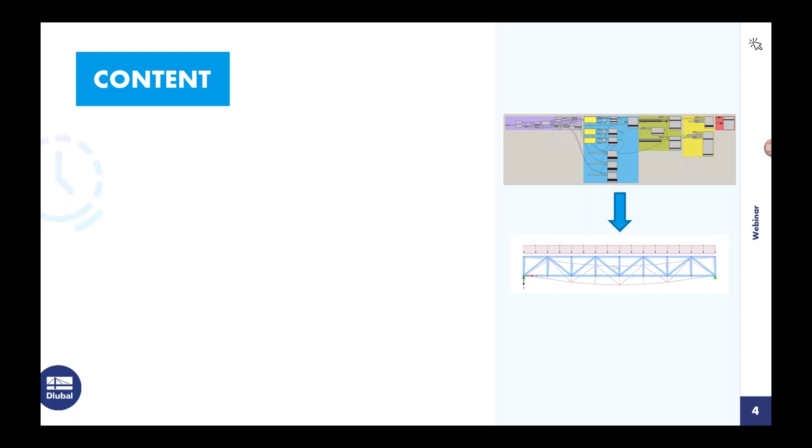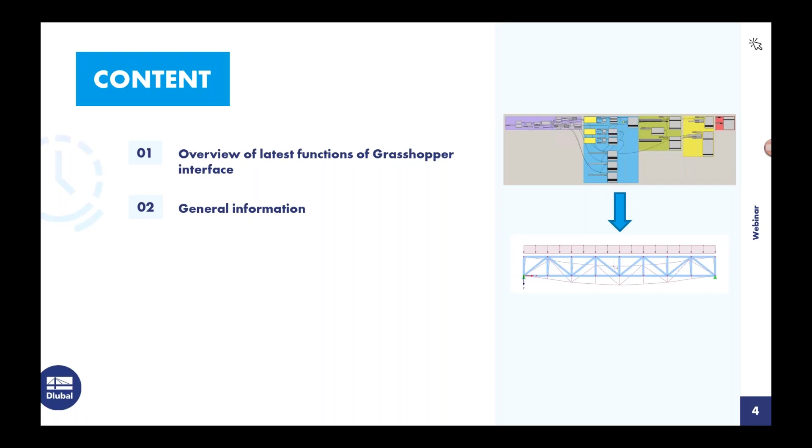So let's start with the presentation and have a look at the schedule for today. First, I'd like to start with an update on the latest implementation we developed for the Grasshopper interface, and then I'd like to show some basic information about the installation and the interface itself. And after that, we create a basic geometry in Grasshopper and define all necessary model and load data and export it to RFEM.

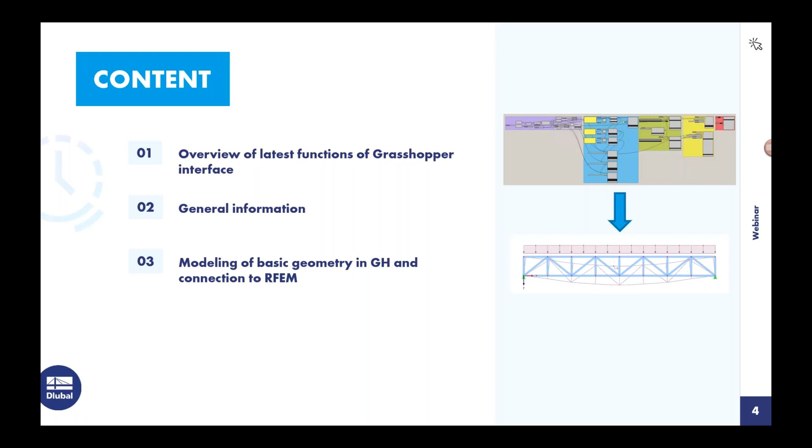So what are the new features we have implemented recently? First, when we're using the member component, we can now assign existing design properties to the member for steel and timber design. These properties are not defined in Grasshopper directly, but we can read them from a template in RFEM. We also have new components for the definition of imperfections, and at the request of a customer, non-linearities were also implemented in the line hinge component.

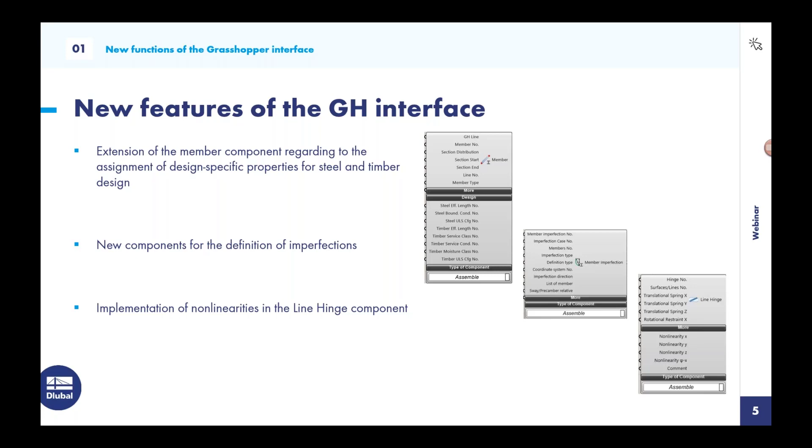The next new feature is that it's now possible to access the templates in RFEM via the export component. So for example, we can now define design properties for steel and timber in a template in RFEM, and access these defined design properties with the member component in Grasshopper. Also, the export of polylines has been optimized, and we implemented new components for closing and opening RFEM files in Grasshopper.

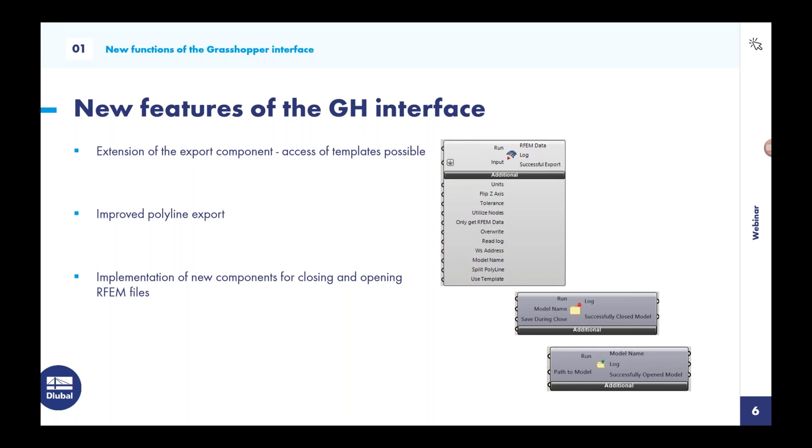Now I will give you short information about the installation. The interface is not automatically installed; the installation must be done manually. With the installation of RFEM 6, you will receive a setup file, which is stored in the folder shown in this image. You need to run the file, and the plugin will be installed for Rhino and Grasshopper. In addition, the web services must be activated in the RFEM program options, so that the connection between RFEM and Grasshopper can be established.

After the installation, we have two plugins. The plugin for the Rhino RFEM link: with this plugin, we can import and export data between Rhino and RFEM. We can import and export lines and surfaces, and this is limited to the pure geometry. So information about sections or material thicknesses is not exported with this link.

In this webinar, we will show you the Grasshopper RFEM link. We have the import and export option as well, with the focus on the export to RFEM components. The import works in such a way that we are able to read the information defined in RFEM and use it further in Grasshopper. We can export model data like sections, members, thicknesses, hinges, materials, and supports, as well as load cases, load combinations, and the loads.

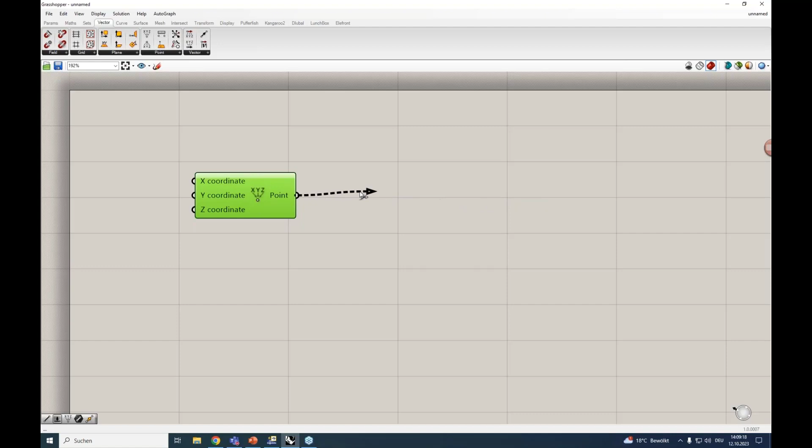In Rhino we have this icon, and here we can start Grasshopper. If we start Grasshopper, we get a 2D script environment, and on this environment we can put different components. For example, we have components like this, with an input and an output, and we can connect these components to each other to create algorithms and build parametric models.

Once the plugin is installed for Grasshopper, we see a Dlubal tab here, and there are 3 groups available in this Dlubal tab. We have one group for the model data, like member, section, material, surfaces, openings, and so on. And we have a second group for the load data, like load cases, nodal loads, support loads, loads themselves, and also design situations and static analysis settings.

And in the third group, we have the export component and other components related to the import. We only need the export component today, and I will go more into detail about this one at the end.

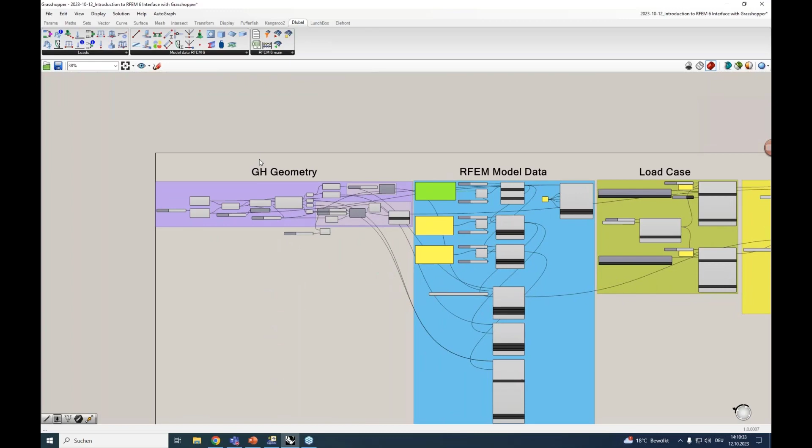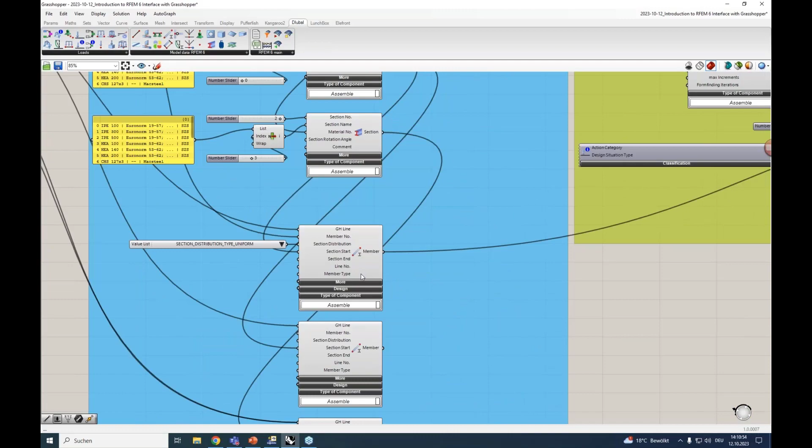And what's the plan for today? A little preview of what we're going to do today. We want to model a small structure and then assign to this structure the model data and load data with the help of the RFEM link. And afterwards, we want to export the model to RFEM. So we assign materials, sections, members, nodal supports, load cases, and loads.

We're going to start today with the geometry in Grasshopper. So we start with a new project, and we'd like to generate a truss girder. I shared the screen with Rhino so we can see how we generate the model in Grasshopper. We're going to generate two lines along the x-axis, and between these two lines we want to generate the truss.

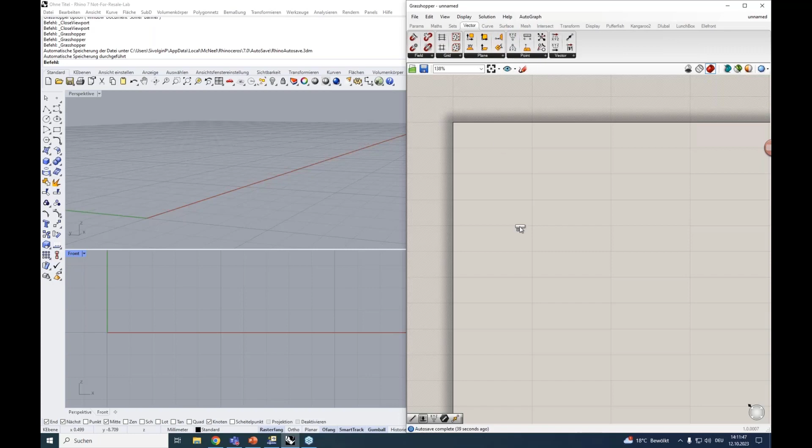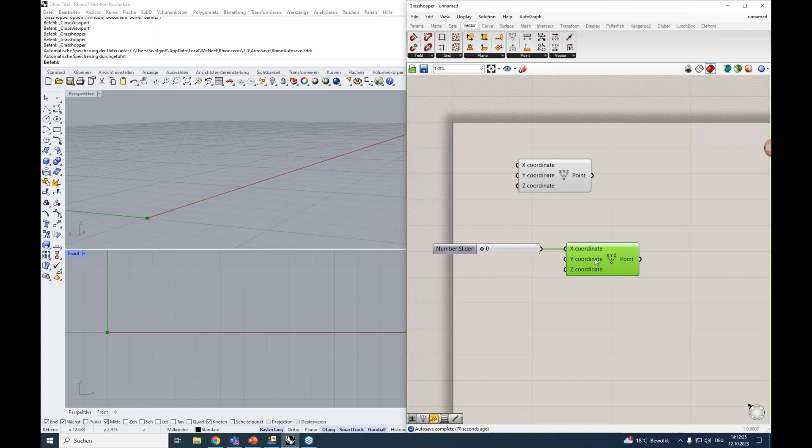First we start with a point. We create a construction point using this construction point component, and afterwards we copy this point by holding down the Alt key. Now we have generated 2 points, and for the second point we set up a number slider for the x coordinate, so we can adjust it with the slider. We double click on the canvas to generate a slider between 0 and 15. Now we can connect it to the input of this construction point component.

After that, we want to create a line between these 2 points. See, this is the second point we created. For this, we use the line component. You can click the canvas and write the name of the component, or you can also find the component in the curve tab and grab it from there. We need a start point and end point as input of this component. So we have these 2 points, and now we can generate a line between them.

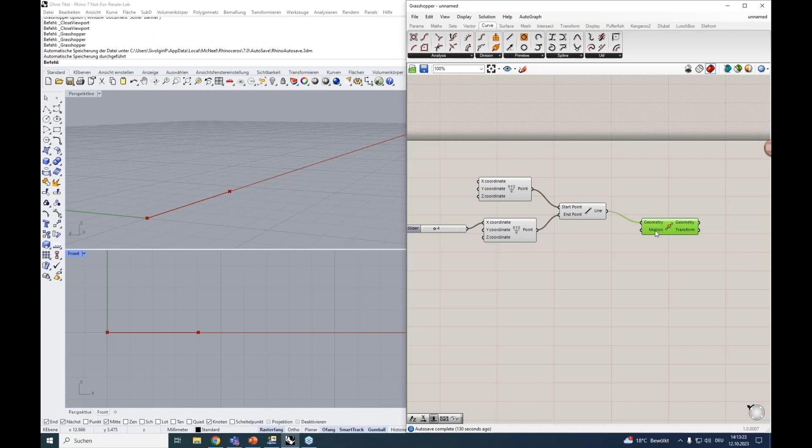Our next step is to copy the line with the move component. Here we have to input the geometry and the motion. The motion is by default set to 10 in the Z direction, but we want to define it ourselves. So first we need the direction we want to move the line in, and we can set up a range again with a number slider. We want it to move from 0 to 5 in the Z-axis. And if we connect it, we see the second line appear here on the screen.

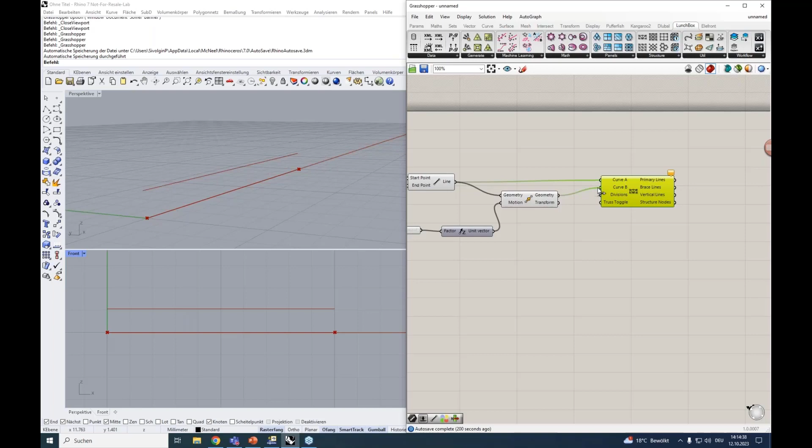After this, we want to generate a truss between these 2 lines. For this, we use LunchBox in Grasshopper. Here we have different options to generate a structure. We want to generate a 2D truss between 2 curves. Our curves here are the lines we're using, and between these 2 lines we can generate this truss.

And for this truss, we can set a number slider for the divisions. That's the number of bays we have in this truss girder. So we set up again a number slider, and now we can control the number of divisions or the number of bays in this truss girder. So that's our structure.

As an output of this generator, we get different outputs. We have the primary lines, that's the lines for our upper chord and our lower chord. We get the lines for the diagonals, and we get the vertical lines, and we also get the points of our structure.

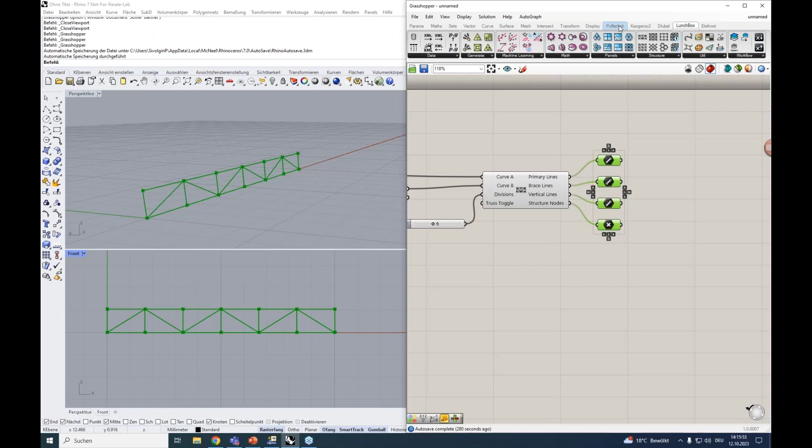So now we want to apply the model data and the load data onto the structure. For this we use these components from the Dlubal tab. And the first thing we want to do is to define a material. If we are defining a material, we have two inputs. The first input is the material number. This is the material index we gave the material in RFEM. We can set it as number 1.

And the material name can be defined with a panel. So we can say we have this material name here and just put it in the component. But we want to use several materials for this example, or just have the possibility to use several materials without having to change the name every time in this component. So for this we can create something like a material library. I copied this from another Grasshopper file. And this is also just a simple panel with the material names inside we often use.

And we can now use this index number in this list to define the material names. And we're doing this with another component, the list item component. With this component, we can retrieve a specific item from a list. And we can access the index number with a number slider. So we have here both material names. So we generate a number slider between 0 and 12. And in the output, we receive now the corresponding material name.

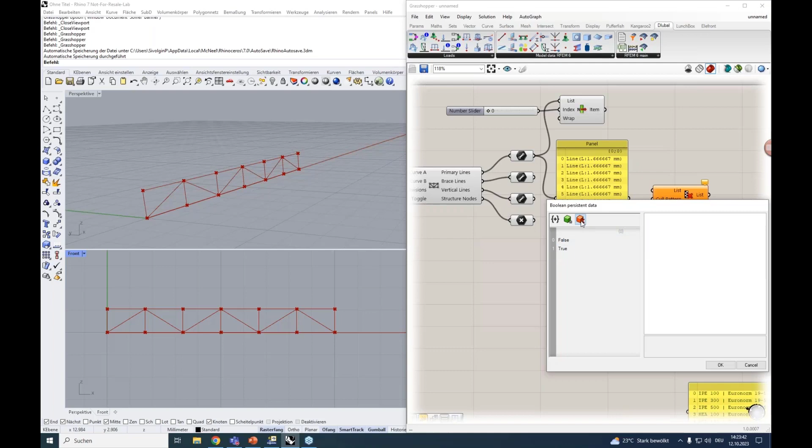We can realize this with the cull pattern component. We can set a rule in this component. We do not want to keep the first element in the list, so we set this to false for the first element. And then we ask, do we want to keep the second element in the list? We say yes, we set this to true. After that, the rule will repeat itself for the entire list. And with this, we get only lines for the upper chord.

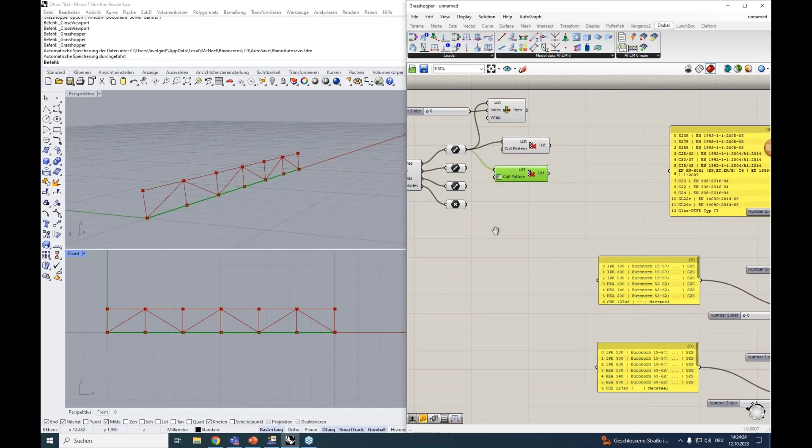And now we can copy this component and invert the rule, so we get the lines for the lower chord. This allows us to separate the member assignment for the upper chord and lower chord. So we define two member components: this will be our upper chord member, and this will be our lower chord member.

The next input in the member component is the member numbering. This is an optional setting, so the number assignment is done automatically in RFEM depending on how we connect the components with the export component. But we need a numbering for the upper chord because loads are assigned to these upper chord members, and the component we use later requires the member index numbers the load is assigned to. For this, we can make a simple list for our numbering, like 1, 2, 3, 4, 5, and so on.

And now we can connect this list to our member component. The problem is that the number of lines we have here must match the count of the numbering we define in this list. So every time we modify the structure, the number of lines also changes, and we have to adjust this panel or numbering every time. So we need another solution for this problem.

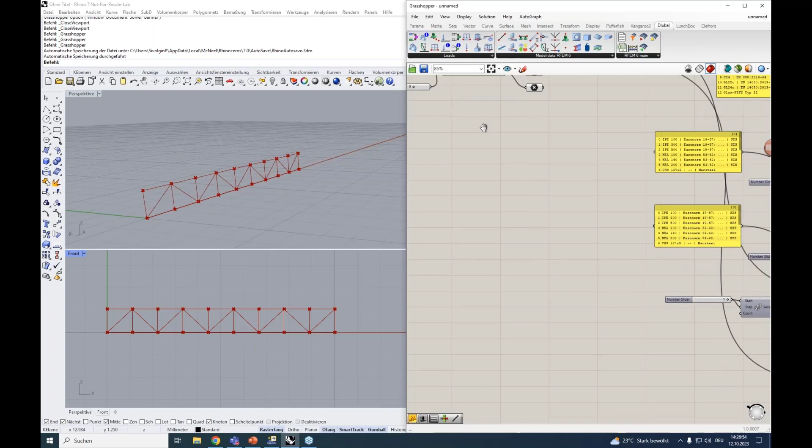We can generate the numbering differently with a series component. A series component creates a series of numbers, and we can start the numbering with 1, and the step size for the numbering is also 1. The number of lines we have is equal to the number of truss bays we define here. So we can connect the count of our list to this numbering, so we always receive the correct numbering of the upper chord lines. We have here 9 lines. If we modify this truss, we always get the correct count for our members. So this will be our member numbering for the upper chord.

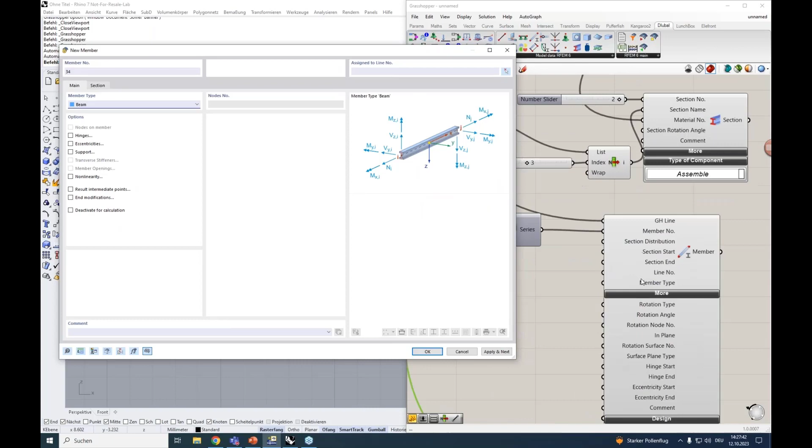So let's have a look at the member definition in RFEM. I can introduce you to this component. Here we have an optional setting for the section distribution. It's by default set to uniform, and you can define it with a value list. A value list is just a list we connect with the input, and we get a list with the possible section distributions we can use.

Here's also a comment that only uniform and linear are supported for now. So we only use uniform and linear, but with this we can model most sections we often use. And if we don't put an input in this section distribution, we get the uniform section distribution as the default setting.

Also, we need to assign a section at the member start. It's also like in RFEM. And we also have the possibility to assign a member rotation with an angle, with a help node or a surface. And for this, we have these inputs here.

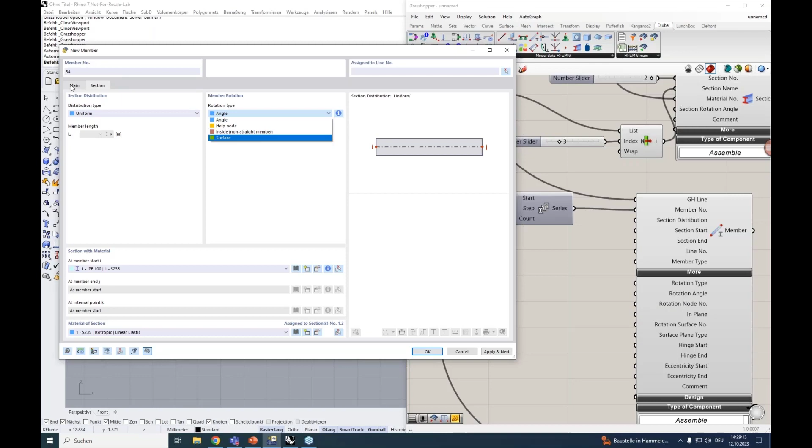And the Grasshopper component also allows us to define hinges or eccentricities for the member. So the only input we need here is the section start. So we can connect one defined section with our member. And with this, we have a completely defined member for the upper chord.

For the lower chord, we use the same member. And here we do not need a numbering because we do not want to link it any further with model data or load data. So this will be assigned automatically in RFEM afterwards. So we also assign a section at the member start. So we choose the same section.

And for the diagonals and the vertical lines, we also generate a member. So we take these Grasshopper lines and connect them to our member. You can hold down the Shift key if you want to put several pieces of information in one input. So we have here two inputs for our Grasshopper member input.

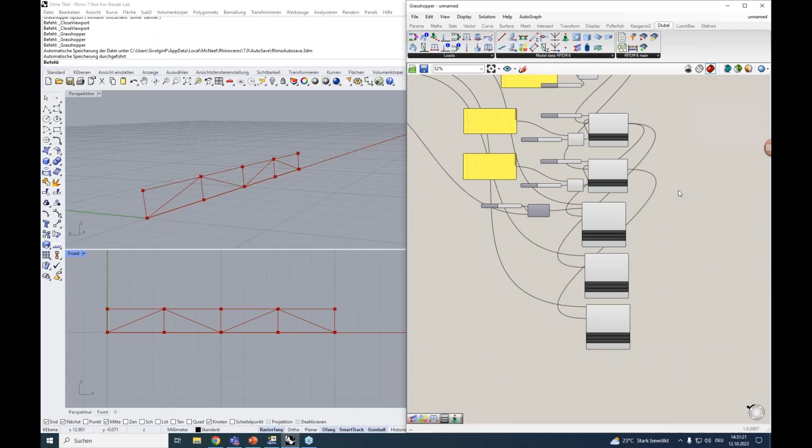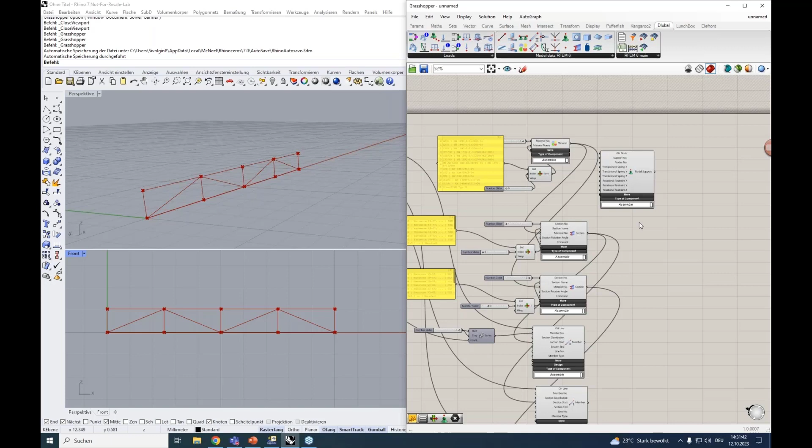Okay, afterwards, we go on with the support for our structure. We can assign a nodal support, a line support, or a surface support. For the structure, we need the nodal support. So we want to define two nodal supports at the edge of the lower chord, and these points we also get from our structure; these are the construction points we use to generate the structure. So we can easily assign these points by holding the Shift key to this nodal support component.

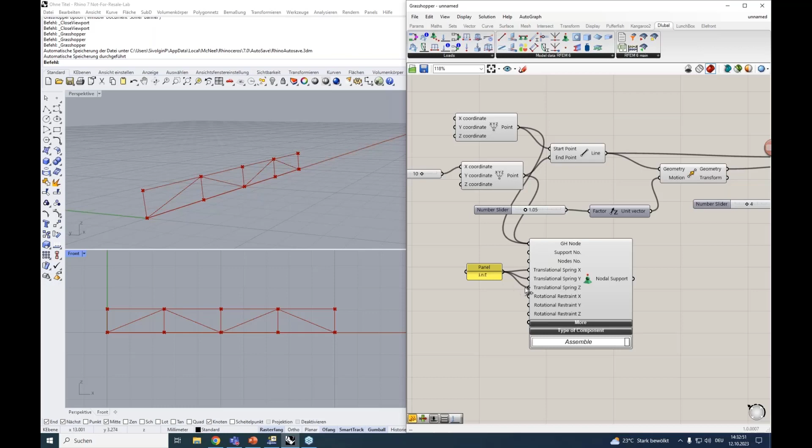And for the numbering, we can also use the number of nodes as an alternative to the Grasshopper input, but here we use the Grasshopper nodes. Next, we define support conditions. We can define a number. With a number, we can define a string. 0 means free, and when we use the expression inf, we can define a rigid support condition. Here we want to define a hinged support. So we defined the support conditions for a hinged support, and we want to prevent the x-axis rotation.

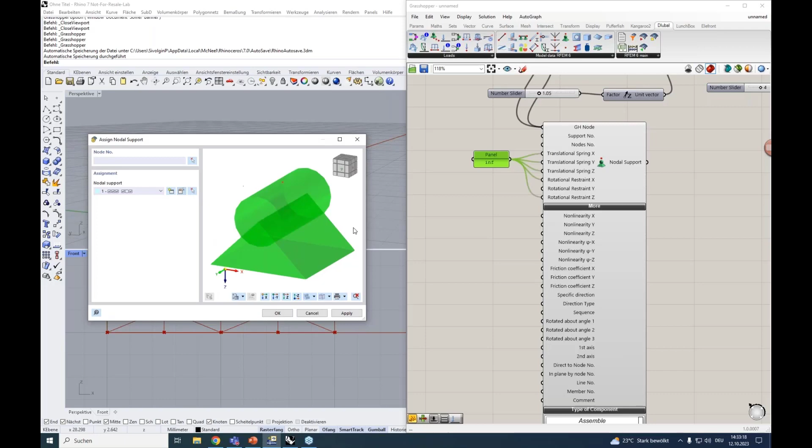And we have here some more inputs. We can now look at this again in RFEM. So if we define a support, we have here some optional settings for nonlinearities, for failure, or for friction, and we can define the friction coefficient also in Grasshopper.

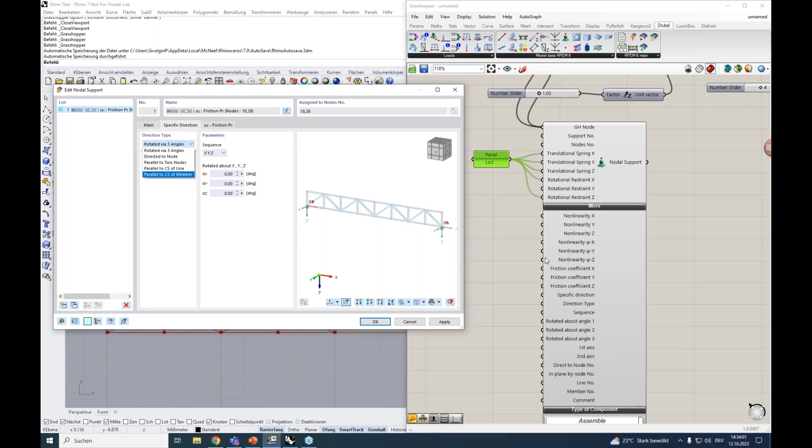And we can set the rotation for the nodal support. And here we have different direction types, and we can set a rotation with one of these direction types, rotated by angle or alignment on a member, node, or line. But this input we don't need in this webinar. So that's everything we need to define our nodal support.

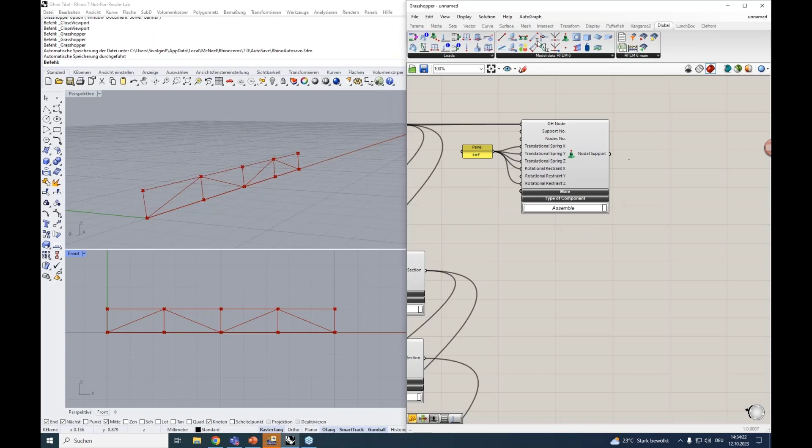And afterwards we can go on with our load data. The structure is so far finished, and now we can generate load cases and loads. At first we define two load cases. For this we'll use the load case component. Here we can assign a load case number. We will generate two load cases, so assign load case number 1 and number 2 to copy it afterwards.

We have the load case name. This we can define again with a panel. Let's name it permanent load, for example. Let's make the panel a little bit smaller.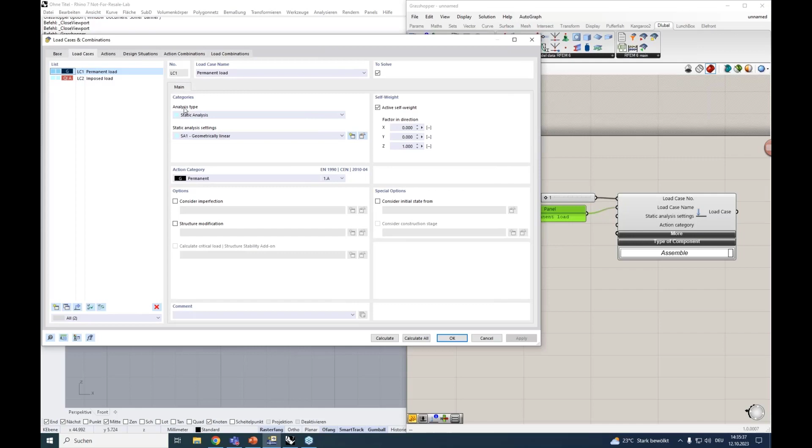And just like in RFEM, we first defined the static analysis settings and the action category. And we can look at this again in RFEM, so it's easier to follow. Here, if you generate load cases, we have the static analysis settings. And for these settings, we use a separate component in Grasshopper. So as you can see, now you can see the static analysis settings.

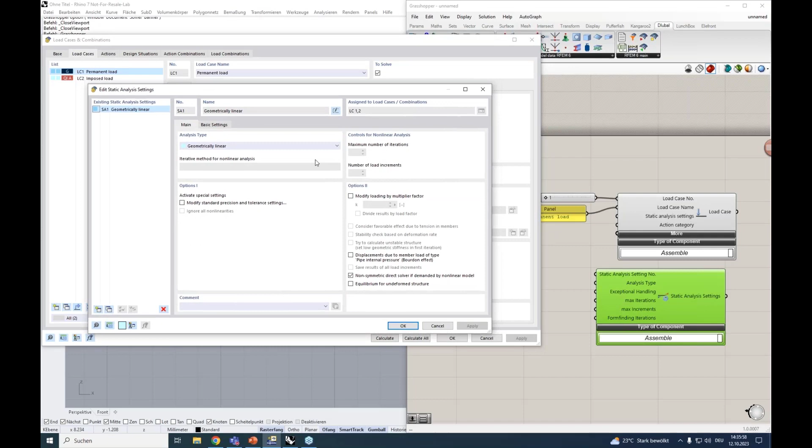So here we have the option to give again a number, and we have the possibility to set the analysis type like linear, second order, or large deformations. And when using tension members, we have the possibility to activate this exceptional handling for failing members so that you don't get an unstable model due to tension members. You find this option here if the tension member is activated in the model.

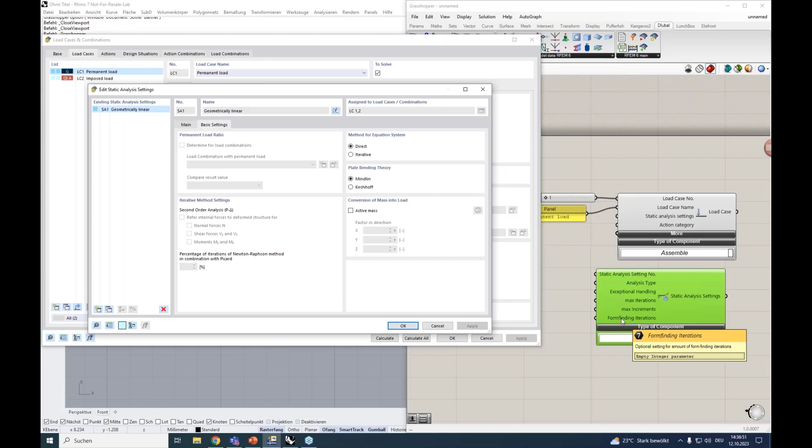And also we have an optional input for the number of iterations and the number of load increments. And this is some input for the form finding add-on in RFEM. So let's define the static analysis settings. First, we give it an index number. That's number 1. The analysis settings are defined by a value list. So we can generate a value list and choose between the options we have here. The other inputs are not necessary for us. Now we can assign the static analysis setting to our load case.

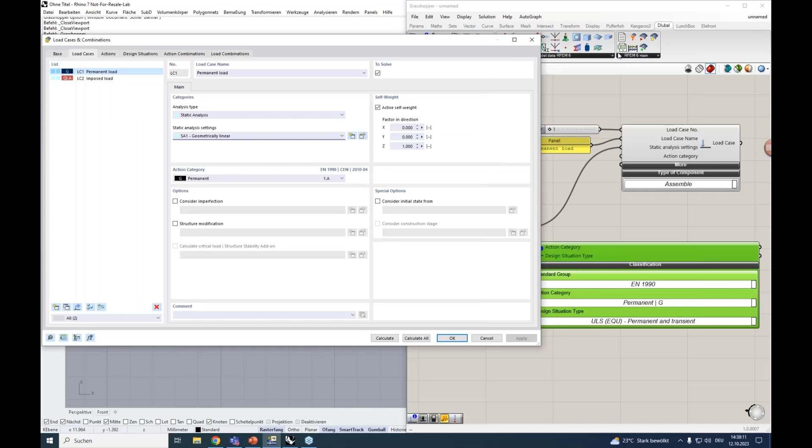Now we're still missing the action category, and the action category is a separate component in Grasshopper. This component allows us to define a standard group, like EN 1990, and to select the corresponding action category for this standard group. Here it is important to note that the standard must also be activated in RFEM in the base data. So if you use the standard in Grasshopper, make sure you have the same standard active in your RFEM file.

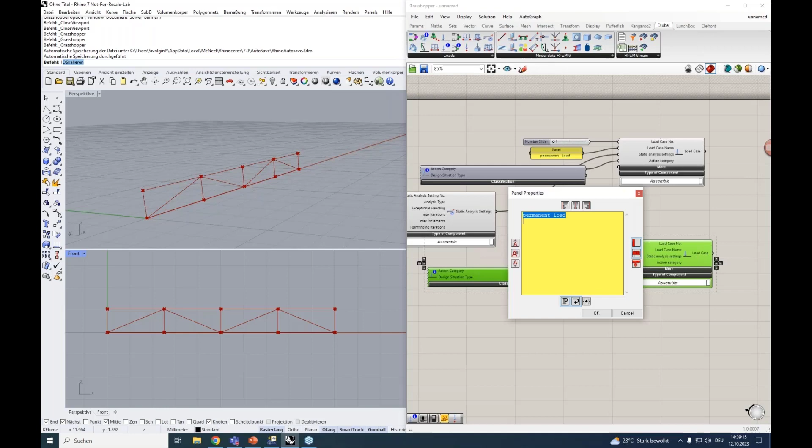So we can disconnect again our load case component. And here we have some options for self-weight adjustments with a factor and the direction of the self-weight. For the first load case, the self-weight is automatically activated in RFEM, so we don't add input here. Now we want to copy this load case, set it to load case number 2, change the name to imposed load, and also adjust the action category to imposed loads. So that's the definition for our load cases.

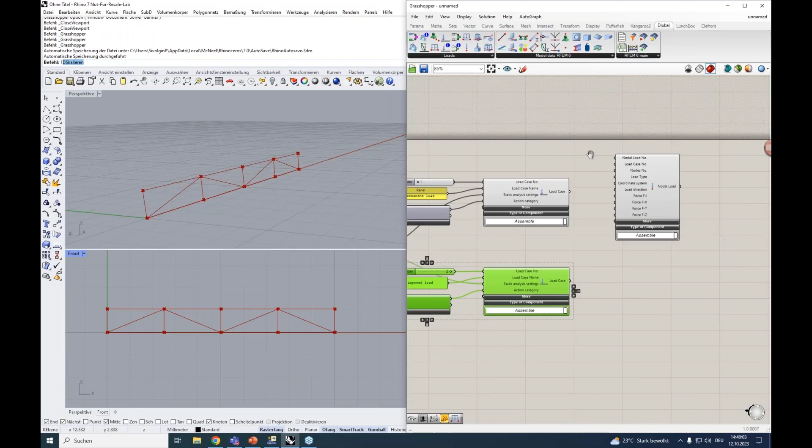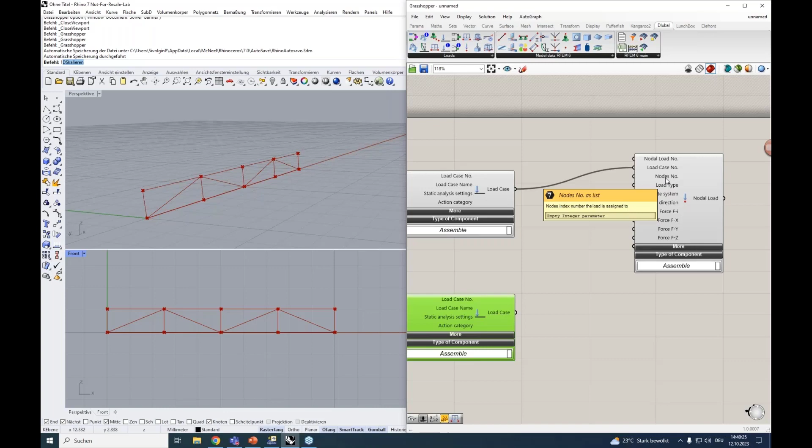And after the load case is defined, we want to apply the loads. We want to apply a nodal load on the nodes of the upper chord, and also a member load on the members of the upper chord. In the nodal load component, we can again define an optional index number for the load. We can assign the load case to this nodal load, so we have load case number 1 and load case number 2. And here we first need to assign the nodes the load is assigned to. For this we have our structure, where we find in the output a list with all nodes. And again, we only need the nodes from the upper chord.

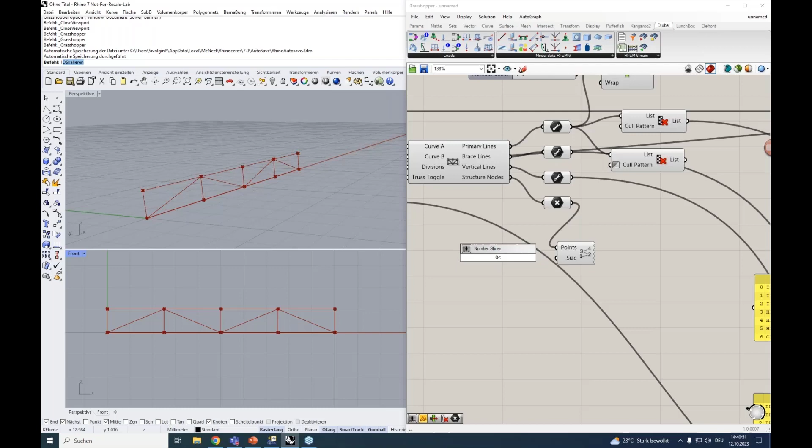And with the point list component, we can easily see the numbering of our nodes. You can define the size of these points. So here you can see that we can display the numbering of the nodes directly in Rhino, and we want a load on all odd numbers here at the upper chord. The problem is that RFEM assigns a different node numbering than Rhino. Rhino starts the numbering with 0, and RFEM starts with 1. So to assign the node loads to the correct nodes in RFEM, we need to define a node numbering so that the upper chord nodes in RFEM match the numbering in Rhino.

So we have this list of nodes, and we want to extract the odd numbers from the list. This is possible again with the list item component, where we take this list and extract the odd numbers. To do this, we need a series component to create a series of numbers. This series starts again with the number one, and the step size is now 2, so we get all the odd numbers. And in the output you see, we get number 1, 3, 5, 7, 9, 11, and so on.

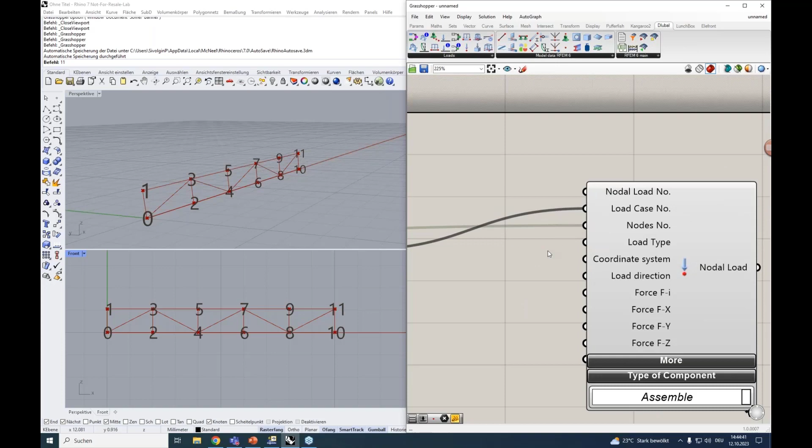So there are some other inputs we need to fill. We can look again at the new node load in RFEM. So if we define a load in RFEM, we have to define the load type, the coordinate system we are assigning to, and also the load direction. So that's the same in Grasshopper.

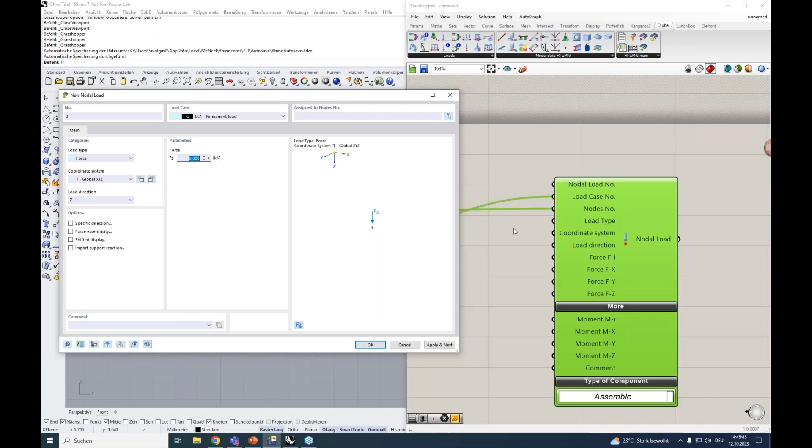So for example, we also can define different load types, and for this we also have the further inputs for the load type parameters we use in RFEM. So we need a normal force, so we only need one parameter here. If we start defining the load type, we see it's again a value list, so we can again define a value list for this. We define a simple force.

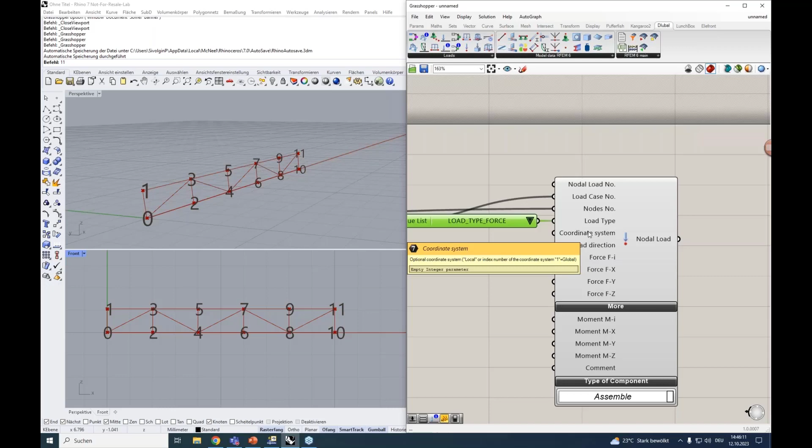For the coordinate system, we can refer to the local coordinate system with the expression local, or we can refer to the global coordinate system with the number 1. We're using the global coordinate system, and the load direction is again defined with a value list. So we can set the load direction in global Z direction.

And at the end, we need to define the force. Here the force is defined in Newton. So let's define 3000 Newton as our nodal force. So that's all for our nodal load.

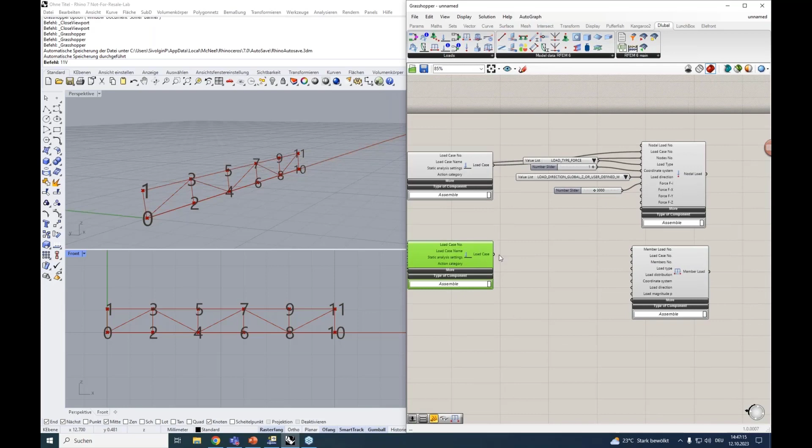After that, finally, we want to apply a member load on the members of the upper chord. For this, we'll use the member load component. Here we have again an optional input for the member load number. We assign our second load case to this member load, and the member index numbers the load is assigned to are already defined for our upper chord. So we take them from our member component. We have here a definition for our member numbering, and we can take this member numbering for our member load.

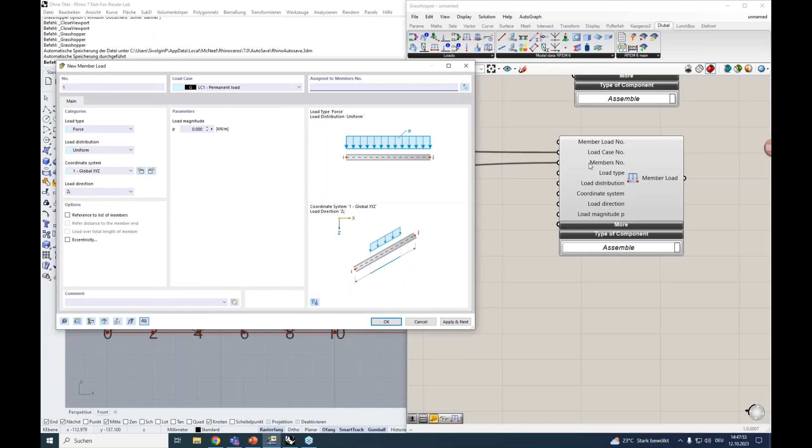The other inputs are again the same as in RFEM. We define a load type, a load distribution, coordinate system, and load direction. Let's look at it. When we insert a new member load in RFEM, the load type is set to force by default, and the load distribution is set to uniform by default. And the same logic applies also to this Grasshopper component. So if we don't give an input to load type and load distribution, it's assumed to be the default setting, here force and uniform.

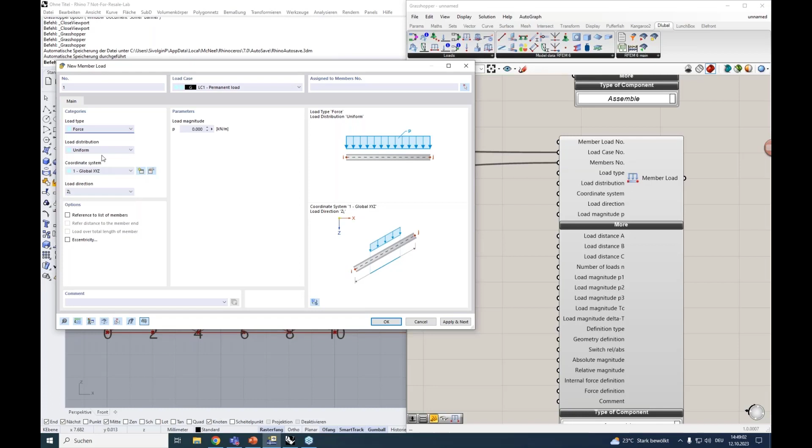If we want something different, we can use the value list to define other categories for the load type and load distribution. Here we see also different inputs for different load types. So depending on the load type or load distribution we define, we have here the different parameters we need to access. And here you have the possibility to access most of them. Not all load types are implemented; the most common are available. So the input of the components remains manageable if we don't add every single parameter.

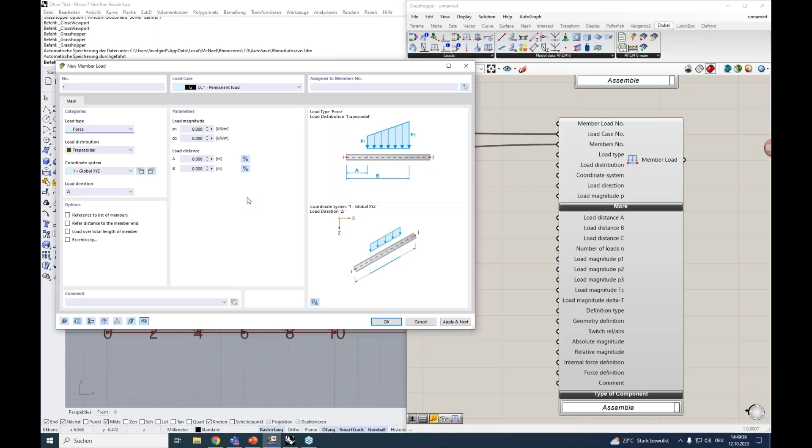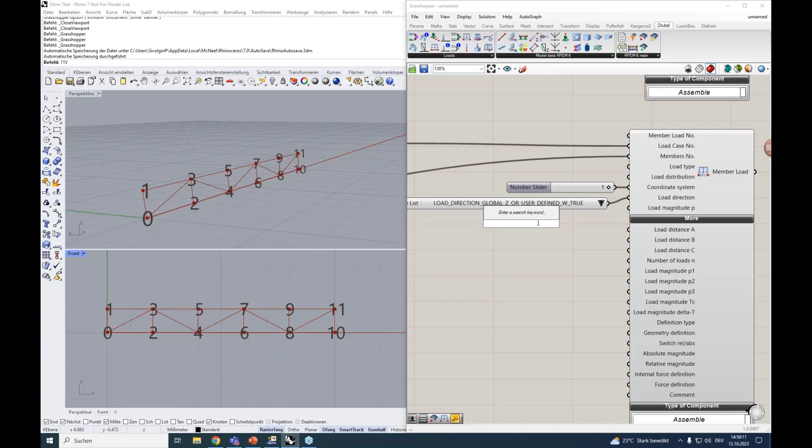And so the only thing we need to input here is the coordinate system. We refer again to the global coordinate system with the number 1. We can define a load direction again with a value list. Load direction we define as global Z in the true length. And we define the load magnitude in Newton per meter. Let's say 2000 Newton. And with this, the member load component is ready.

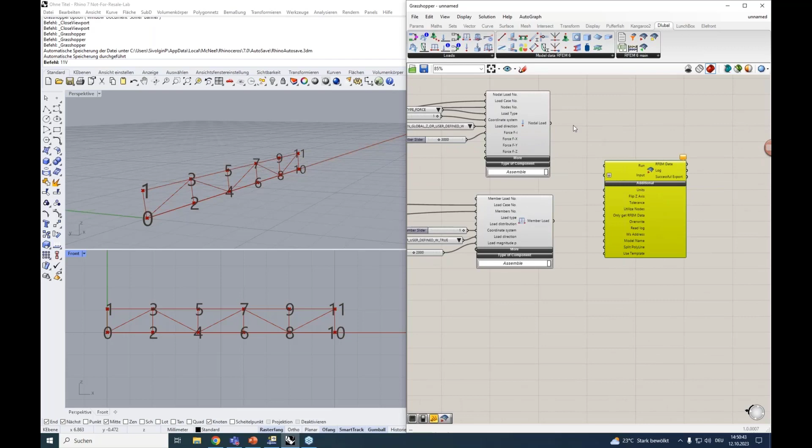And now we want to export this data to RFEM. For this, we use this export component. The export component must be connected to the defined data, so we need an input for the model and the load data we defined. So we have the material, the sections we defined, the members we defined, also the nodes here, our nodal support, the static analysis settings, our load cases, and finally also our loads.

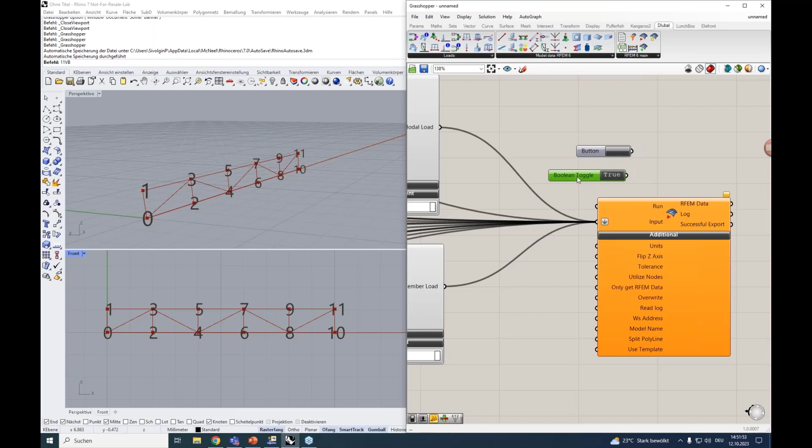So we can run the export once with a button. For example, with this button we can run the export once, or we can use a Boolean toggle. And with a Boolean toggle, we can create a live link between Grasshopper and RFEM. So we can set it to true, and the connection remains active between Grasshopper and RFEM.

So if I adjust some parameters in Grasshopper, like here, the RFEM model will be automatically updated as long as this Boolean toggle is set to true. There are some other inputs we need to fill. So we want to overwrite the model in RFEM, and we also want to flip the z-axis.

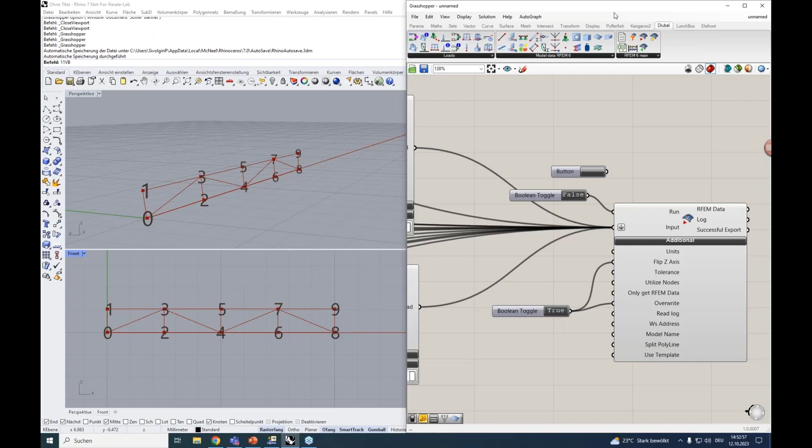If we want to generate a new model in RFEM and don't overwrite a model, we can also define a model name, and a new model will be generated in RFEM. So let's look at the export in RFEM directly. Let's move RFEM on the screen so we can see the export. I will delete all data in this file here. And if we set the Boolean toggle to true, the export will be started.

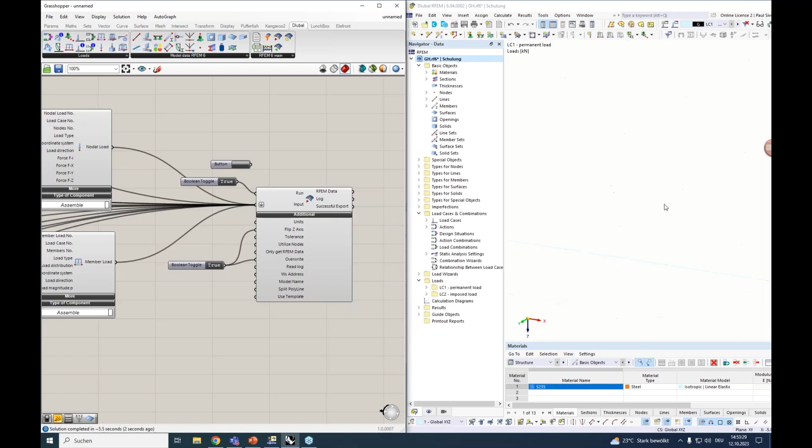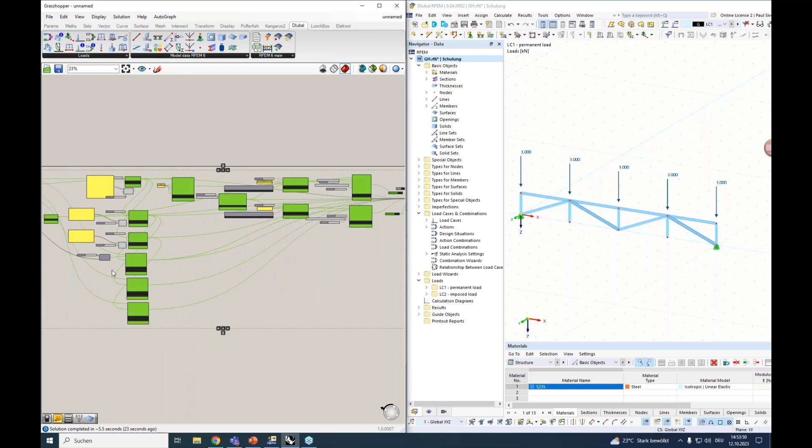Okay, I forgot something. Maybe we're missing the lower chord. So we can check if we connect the member with our export component. Why is the lower chord missing? The member is missing for the lower chord. Let me check this. Okay, these are the lines for our lower chord, and we didn't assign them to our member. We got the wrong input here.

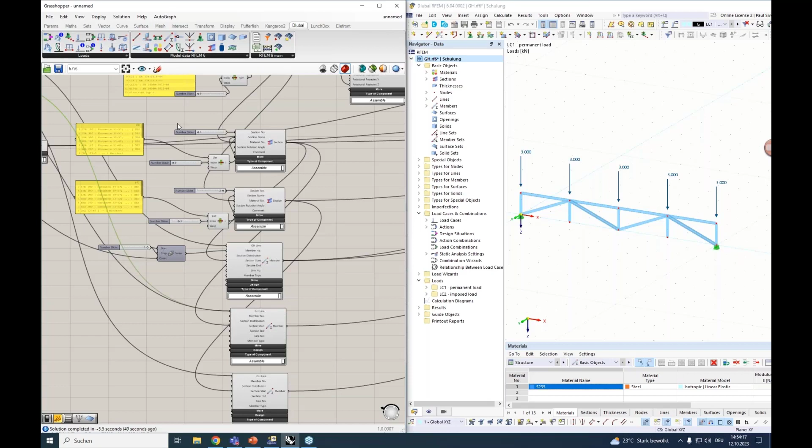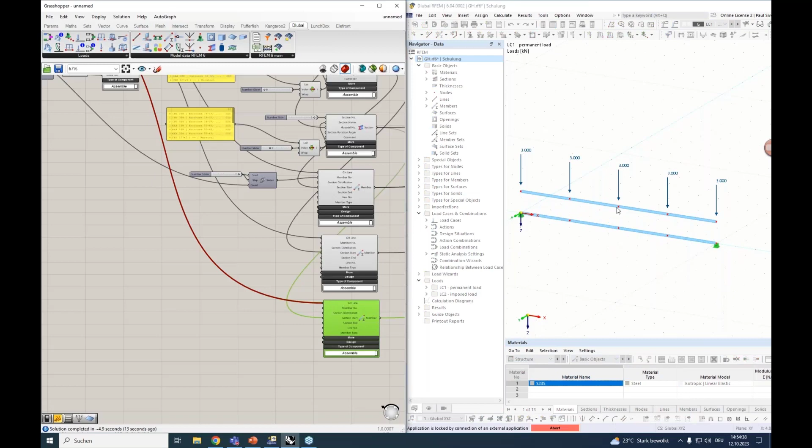So as you can see, we have a live link. So if we change something here, okay, we have the wrong assignment for the diagonals and the vertical lines. I will correct this fast. I can disconnect. This was connected to our upper chord. You see, if I work on this model, the RFEM model is also updated.

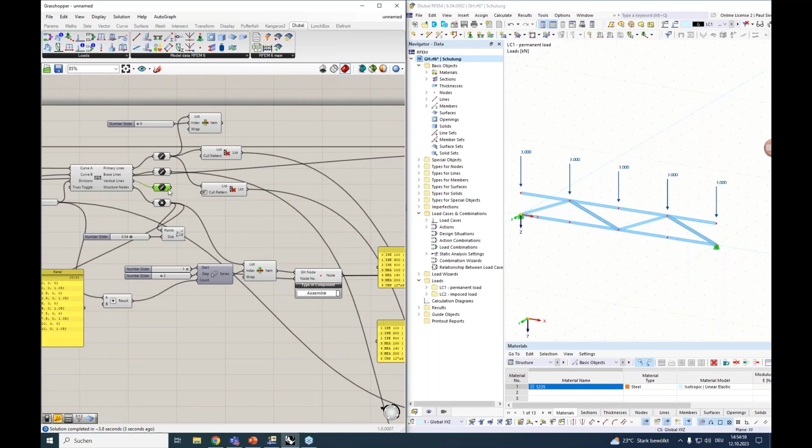So here we have the lines for the diagonals. Set it in this input and see the update. And here we have the lines for the vertical lines. So now it should be correct. Yeah. So we have now exported the model to RFEM.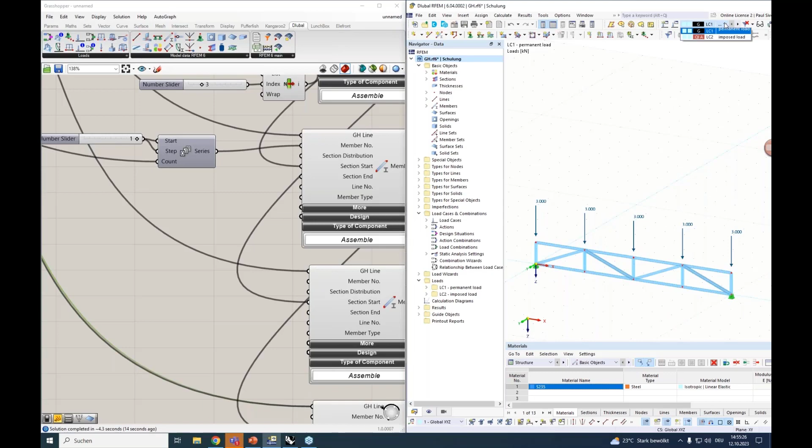You can see the structure is exported, the supports are defined, the load cases are defined, load case 1, load case 2, and also the load is assigned. Now you can continue working with this model in RFEM, start a calculation, create load combinations, or start analysis or design calculation. Yes, and so that was the basic introduction into the Grasshopper RFEM interface.